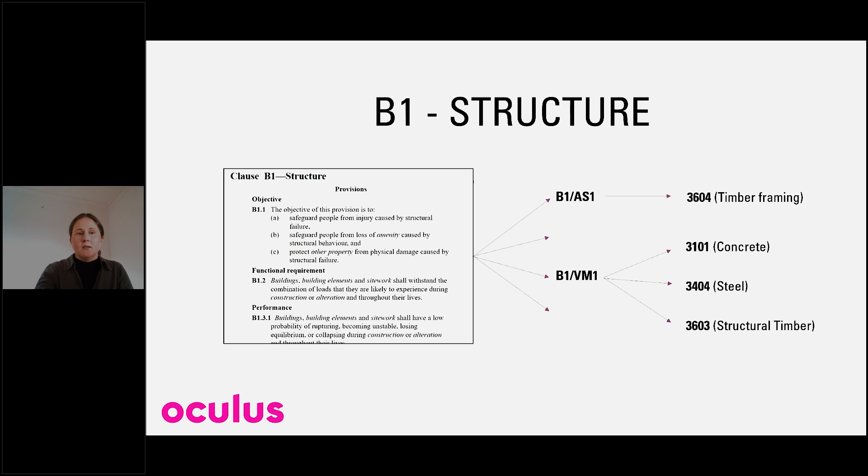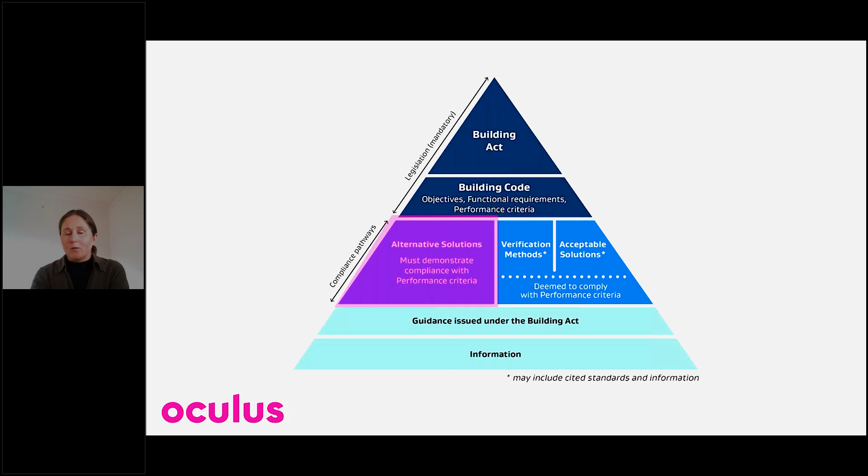Now, we also need to remember that we always have the alternative solutions sitting next to verification methods and acceptable solutions. That's highlighted in pink on the left-hand side here. That would be common, for example, with mass timber design or base isolated structures. They are currently not covered by any of our acceptable solutions or verification methods. And these alternative solutions exist for showing compliance to all code clauses.

So the same applies to H1. Our overall goal or objective is to facilitate the efficient use of energy. Under that, we have our acceptable solutions, which encompass both the schedule method, which is getting phased out at the end of this year, and the calculation method, which is slightly more flexible but still somewhat limited. Then we have our verification methods, commonly termed the modelling methods. Again, we have alternative solutions that are possible and sit alongside those compliance pathways.

Now I've got a little note there, my last slide. Note that none of the methods of H1 compliance will actually tell you how much energy a building will use. They're only really useful as a comparative tool. And it says that explicitly in H1VM1: the results of thermal modelling should not be construed as a guarantee of the actual energy use of the building. So they're quite plainly stating that this is a box ticking exercise and will not be in any way reflective of your power bill at the end of the day.

H1 also allows designers to manipulate or game the model. So you can theoretically make the reference building worse to make your design look better and therefore compliant. It also allows all sorts of thermal bridging, depending on your interpretation of some wording.

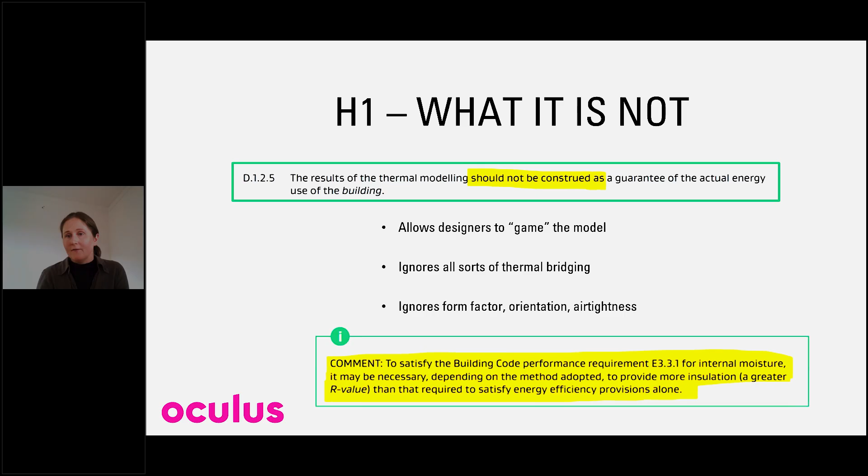of the building. And one last thing that H1 does not do is that it doesn't cover off E3 internal condensation. So to John's introduction point, by ticking the box of H1, we can't assume that we've ticked our E3 box. We might need to be coming back and adding more insulation to achieve internal moisture control. So that's our status quo.

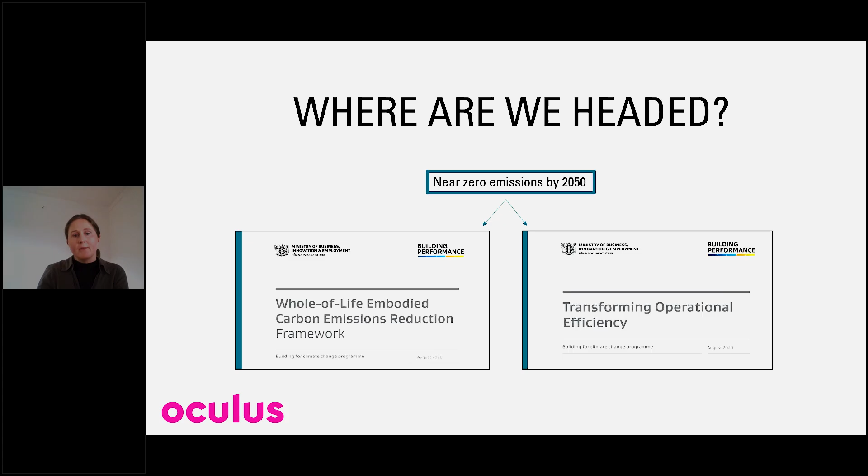Where are we headed? So New Zealand has signed up for near zero emissions by 2050. That applies to the construction industry, and we've got to balance two parts of that, both the embodied carbon, so the amount of carbon that's built in to a structure at the start of its lifetime. That sits probably best under the B1 topic of this presentation. And then we've got operational efficiency, so all of the energy use that that building will have over the lifetime of that building, and that's sitting more under the H1 part of this topic.

So under the operational efficiency, the Building for Climate Change program that MBIE has presented actually has targets to reduce our thermal performance demand in a series of stages. We've got an initial cap, an intermediate cap, and a final cap. Now they've listed the final cap in 2035, so only 10 years away, and that number that I've highlighted there, 15, is actually the same as the performance target for a passive house classic design in New Zealand at the moment. So it's a pretty ambitious target, I think, for 10 years.

It's fantastic to see, but it really indicates that the direction that we're going, we need to really be making massive improvements in the efficiency of our buildings. And that approach can become problematic with our common, status quo design approach of just shoving insulation in at the end, both from an energy efficiency perspective, but also from a moisture control perspective and a durability perspective. We've got more modern buildings that are more airtight. There's often not enough or adequate ventilation provided. And we've also got a compounding factor that less heat is escaping from our buildings because of this extra efficiency

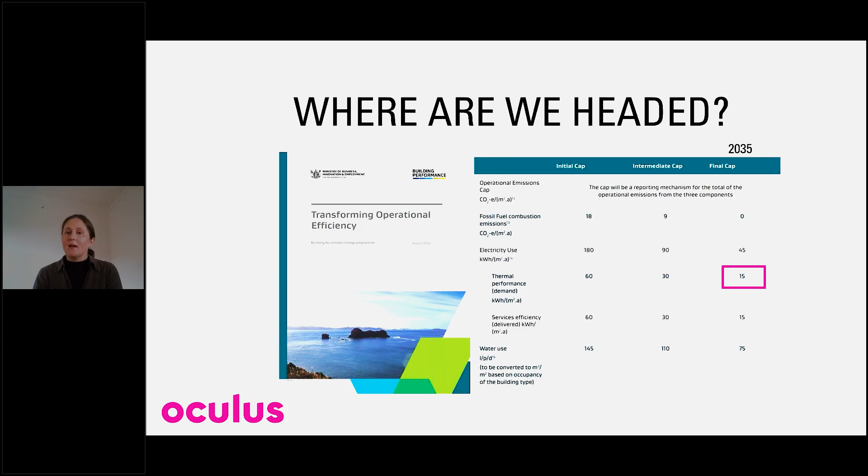that we're designing in. And that heat has, in the past, allowed us to get away with some bad design decisions where moisture would accumulate and then the heat would dry it out. If we've reduced our energy loss across the thermal boundary, then we're reducing that ability for our buildings to buffer themselves and fix the mistakes that we've put in. So yeah, that approach that we're currently heading down only can get us so far. If we're going to achieve these big targets that we've got, especially by 2035, then we need to start taking a step back and thinking, at an earlier stage, about holistic design.

So ways I think we can do that, again, is lifting the knowledge across the board. As I said earlier, we've got disciplines right the way across the mechanical engineering, architectural, structural engineers, quantity surveyors. They all need to understand these fundamentals so that those early stage design decisions are appropriately geared and setting us up for success. And good, you've jumped in here, John. We're going to use some of the tools where our building code might be lacking in the guidance that we have. You know, we need to start thinking about what experience our international colleagues have in this high efficiency design stage.

So, Robyn, I think it is a good time to jump in with the first question, and it came actually probably during my introduction, which I can understand, and this is really what this discussion is about. So the question that came through is, how can you say there is no problem with the building code and it's the industry understanding that is the problem, where there is no code requirement for airtightness or proper ventilation, recessed windows, etc., etc.? Do you want to give that a crack at responding?

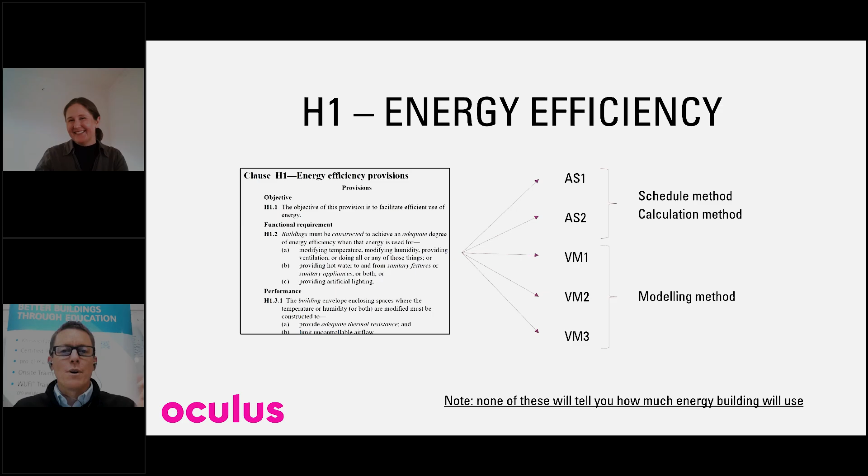Yeah. Right. Hey, I've got one quick question for you, which it's just a short one just to add in here. So when doing a small addition or alteration with, will the schedule method still be available, or will you need to calculate the whole of the existing, even if it's unknown? Is it? Oh, we don't need to answer it. If you don't know, that's fine. We'll just keep on cracking.

I think the status quo still applies, that the part that you're renovating needs to be meeting code. Whether you do that via the schedule method, the acceptable solution, sorry, the schedule method calculation, or modelling, if one of those gets taken away from you, you'll still have to meet compliance via the other pathways for the renovated portion.

Cool. I'll jump out the way again and let you crack on. Cool. Okay, thanks. So I think I've talked enough about fundamentals, and we've got to get into some physics.

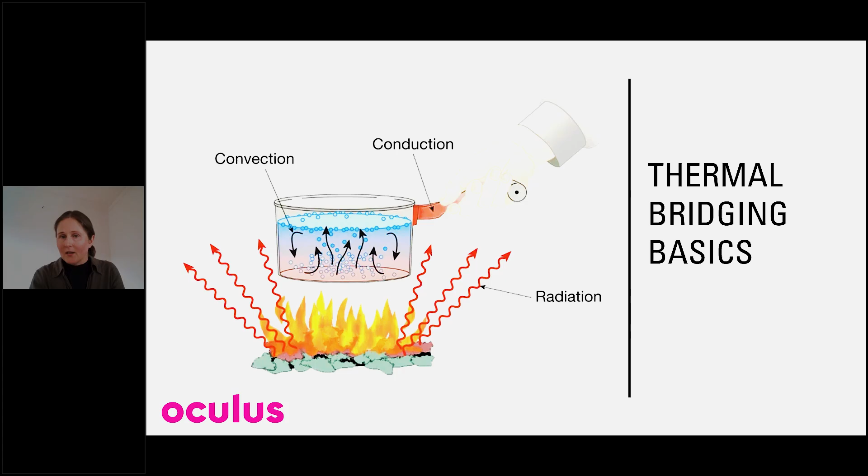So, thermal bridging. I think that's really the confluence of these two topics, structure and energy efficiency. A thermal bridge is where our layer of thermal insulation is interrupted. It relies on the concept of heat transfer via conduction. If you look at this little diagram, it's that person's hand getting burnt by the pot handle as the pot handle warms up. In an ideal world, our insulation layer would be completely continuous, not interrupted by anything, and would be outside of the structure to minimize the heat fluctuations and the moisture fluctuations that our structure needs to undergo. And that leads into durability.

So what's the problem with thermal bridging? It's not a very new concept, but it's completely overlooked because it's very easy to underestimate. It's supposedly hard to calculate. We can show you how to calculate that later on in the presentation. There's previously been a lack of data available. Again, I'm going to show you where to find the data during the presentation. It can be difficult to mitigate thermal bridges once you know you've got them.

And the kicker for me is that mitigation is not specifically required by our H1 AS1 and H1 VM1, acceptable solutions and verification methods. I think the wording in there is that you have to consider thermal bridging. But once you've had a few minutes of consideration, you can move on with absolutely no changes to your design. So yeah, I think we don't have a good framework for solving thermal bridges in our acceptable solutions and verification methods yet.

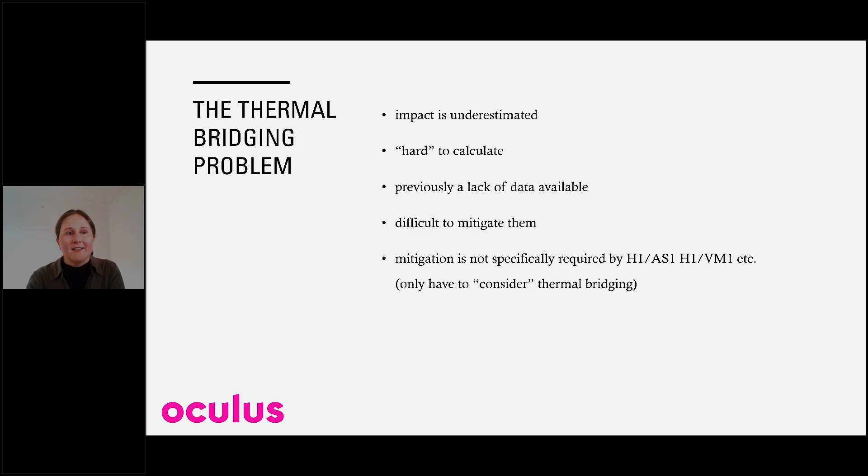So why should we care then? Well, we've got ultimately that goal of improving our thermal efficiency so that we can use less energy. We also want to reduce our risk of condensation and mold growth, and I'll dive into this a little bit later on, and also improving thermal comfort.

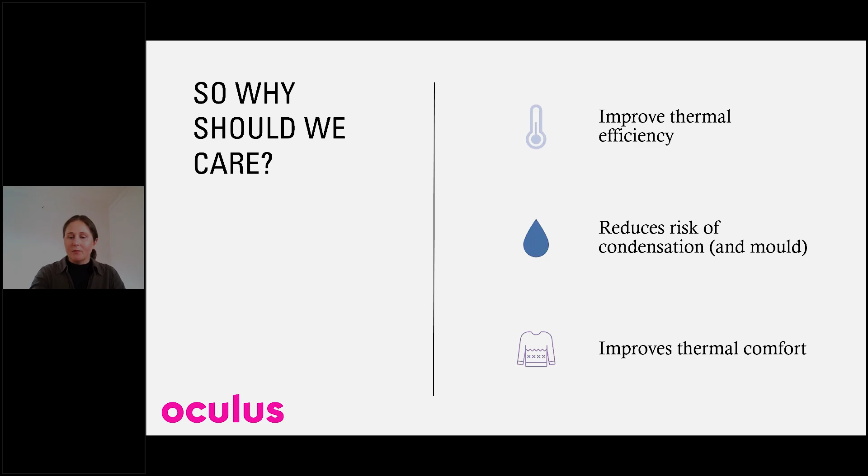Now, this is often quite a hard sell at a design table for a commercial building or institutional building. But when we talk about our homes and designing our homes to be comfortable, I think that really hits home for people. Thermal bridges create spots where heat can escape or enter more rapidly, leading to those zones being colder. So if you're sitting between something like a window and the heater in the middle of your room or office, your body is radiating more heat towards that window and less heat towards the warm interior. And so it leaves you feeling quite unbalanced and therefore uncomfortable. So if we can mitigate those thermal bridges, reduce those cold spots, then we feel much more comfortable in our homes, offices, institutions.

Now, I think key to this discussion is realizing the differences in the material properties that we commonly work with. So right at the top there, I want you guys to all remember this number when you go home. Steel has a massive thermal conductivity of 50 watts per meter Kelvin. Now, if you compare that to something like timber, which is in the decimal places, or insulation, again, 0.04, that number, that 50 number is huge.

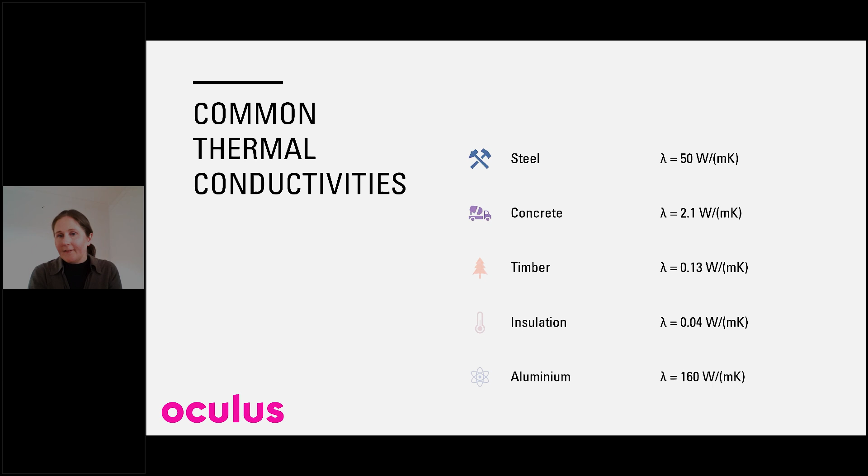Aluminium, again, that's off the charts, and you can see why there's been such a push lately towards thermally breaking our aluminium window frames. So yeah, the key thing to keep in mind here is the relative difference between these materials, so that we can better understand which of our thermal bridges are going to have more of an impact, and we can focus our efforts on mitigating those ones.

Another concept to keep in mind, heat flows in 3D. So whenever you're working with U values or R values, you need to keep in mind that these rely on assumptions of 1D heat flow, which is accurate if your assembly is consistent, like if you're between areas of your stud and you've got a nice chunk of batt insulation there. You've got even heat flow across all of those layers. But as we get closer and closer to the studs, if they were steel or even timber, we're going to have this heat flowing in 3D around those different elements.

And you can see here an illustration of that. The nice colourful picture on the left-hand side shows if you've got a steel column within the depth of your wall and you've got insulation on either side of it, the temperature of the steel on the interior side of that steel is essentially the same temperature as it is on the outside. That insulation on either side of it is not doing anything really to change the temperature of that steel. So by the time you reach the gypsum board on the interior side of the steel, those temperatures are around 8 degrees, even lower, and that gives you that risk of condensation.

So you can see on the right-hand side, that picture shows it really well. If you had a steel stud, you've got risk of moisture accumulating on that side, and therefore potential for mold growth in those areas. So we get those common strips of EPS to thermally break steel studs on the outside of the framing, but we need to think about, okay, those strips need to be at least a little bit wider than the steel stud to effectively mitigate that heat flowing around the corners, and ideally it would be continuous right the way across that layer, between the sheathing or cladding and your steel.

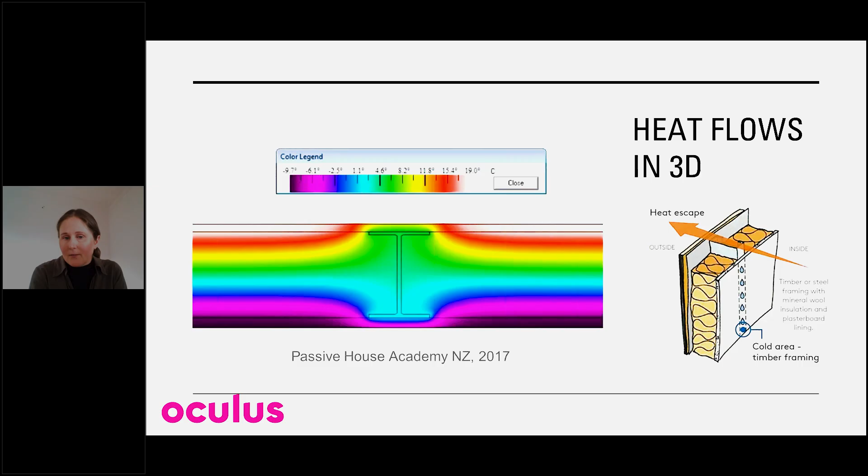All right, so as I said at the start, we're going to touch on internal moisture, E3 as well, because it's so related here. So going back to the code clause, again, our goal or objective is to safeguard people against illness, injury, or loss of amenity that could result from the accumulation of internal moisture. And then we step through into the functional requirement. Buildings must be constructed to avoid the likelihood of fungal growth or the accumulation of contaminants on linings and other building elements. So that's actually fantastic in my opinion.

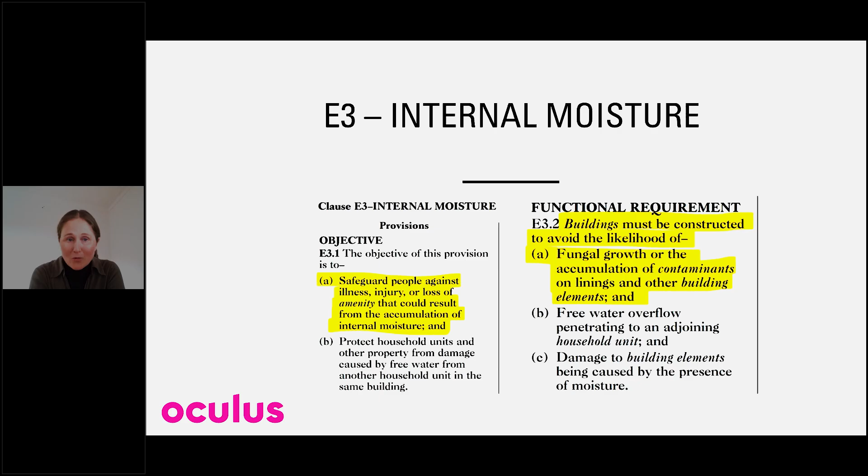I think E3 as a code clause is awesome, but unfortunately it really again starts to break down when we reach the acceptable solution. There's such limited guidance around a key thing like thermal bridging, and it's led to a lot of confusion in our industry.

Sorry, I have to take a little pause. I'm 7 months pregnant and puffing and panting my way through this presentation. You have to excuse me.

Recently had an example. I'll just jump to the next slide actually. We define thermal bridging in three different ways. It's the same thermal bridging, but this is just the name. These are just the names that we give them.

So if you're dealing with an area, so a wall or a roof where you've got a regular interrupting structural member like a steel stud or a timber stud, those types of thermal bridges can often be dealt with in the U value or the R value, and so we call those 1D or an area thermal bridge. The next one along is a line, so a 2D thermal bridge, for example, a slab edge or a mid-floor in a multi-story building. And then a 3D is a point thermal bridge, so an example there like a steel beam that's penetrating out

through the thermal envelope. So that example that I was about to start earlier, we had a project come across my desk where the roof structure had these steel beams that were supporting a canopy that wrapped around the house, all the way around the outside of the house. And in consent, the building consent officer correctly pointed out that there was a lot of thermal bridging going on, and therefore a high risk of condensation problems at the points where these beams penetrated through. But unfortunately, they referenced that clause in the acceptable solution.

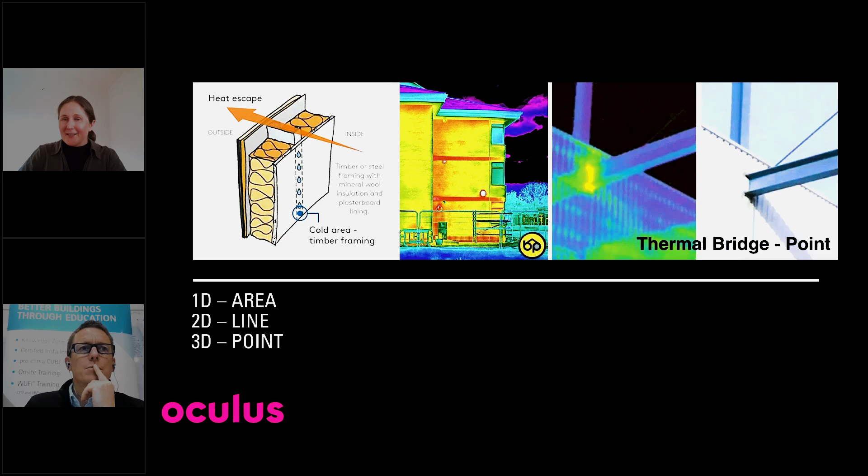So yeah, that's a really good example of how our code, or the detail that's provided in our acceptable solutions and verification methods is causing confusion, because there's not really the fundamental science direction given. So we need to look elsewhere. We need to be thinking alternative solutions, international guidance on how we can mitigate these thermal bridges. Do you want to jump in there, John?

Quick question. Yeah, can you just spend a moment with the 1D area, because it looks from your diagram there like it would be easy to see that as a line, because it's one piece of steel. You just want to describe how you differentiate between those two? Yeah, sure. You're absolutely right, and the concept of thermal bridging still applies across these different definitions. It's just the way that we term them and deal with them in energy models. So, for example, in a wall or a roof, we have studs at 400 centers or purlins at 900 centers. Those are repeating elements, and we can predict and estimate those and average the effect of those thermal bridges into our U value or our R value. So that's a nice simple way that we can account for those, what they are, as you say, line thermal bridges, but we can bake them in to our R values.

Okay, across an area. And then just really briefly on that, then with that diagram on the left, the best way of dealing with that wall with steel frame, because the steel frame's not the problem, right? The material isn't the problem, it's how we've dealt with it. So how do you deal with that? So the best way to deal with steel framing thermal bridging is to have a continuous layer of external insulation sitting outboard of that steel framing. So that means it's going to go right across your building paper or your cladding line, and it's going to be continuous. There will be no interruptions, and no ability for that heat loss to escape. Right, cool. Excellent.

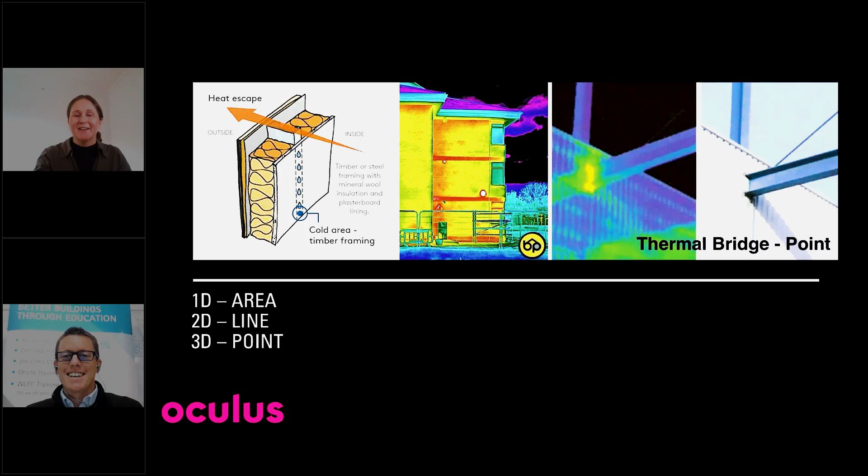Thanks, John. Okay, so if we were to look to the Passive House Standard, international experience, how can we more accurately define and therefore mitigate these thermal bridges? Well, we would use a 2D or a 3D software modeling tool, and we would be modeling to this ISO standard. And there's software packages out there such as Flixo and Therm in the 2D space. In the 3D space, I'm not that familiar with them, but they're all sorts of finite element analysis based software tools for modeling elements in 3D.

So here's an example of where a balcony is supported by steel beams that are point thermal bridges, so 3D thermal bridges. They've been modeled in a 3D software program. You can see that in the nice isothermal colorful picture in the middle. And then they've designed the thickness of the thermal break that they've put between the steel and the concrete mid-floor, and then they've designed that thickness to meet the requirements of what we call the FRSI, or the hygiene criteria. And that's just a pass or fail criteria, and that demonstrates whether you've got a risk of mold growth at that point or not.

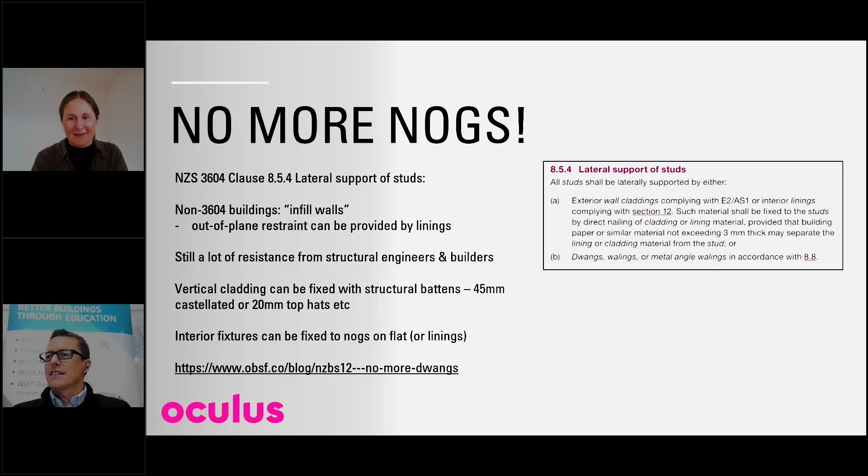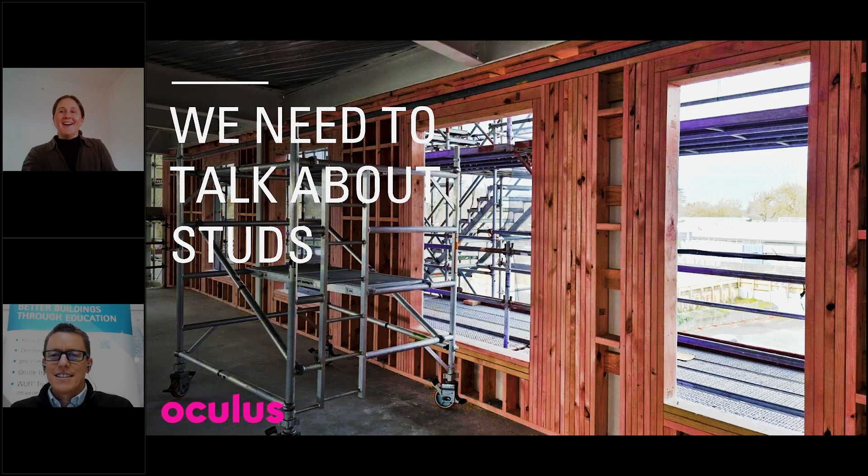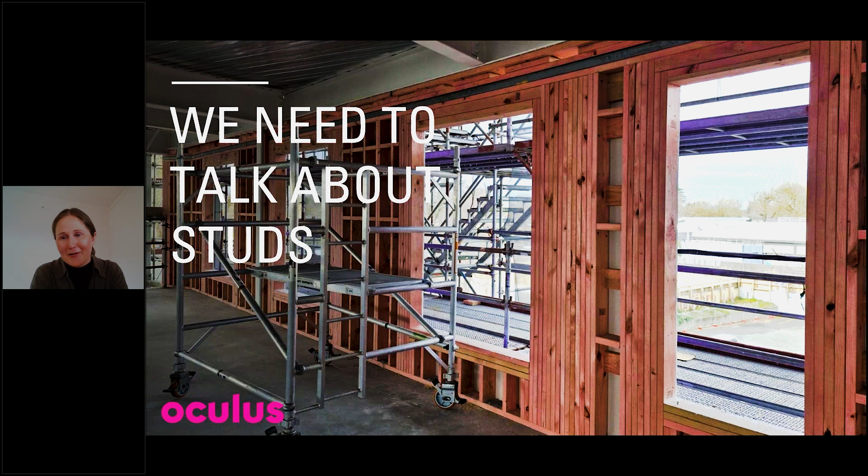Right. Now this is the big one. I got a little bit despondent about this recently, having had the battle in the design meetings, managed to convince everyone that we didn't need nogs, and then got to site and we see things like this all the time. That picture is taken from one of our construction sites, and I've counted them: there are 14 studs next to that window jamb. 14. I cannot rationalize what you would need 14 studs for. All I know is that we have lost an opportunity to insulate that wall properly.

A Beacon Pathways study, not that recent, actually a few years ago now, found an average of 34% timber in our typical walls, whereas H1 calculations sit around an average of 14 to 18%. So we're massively overestimating the thermal performance of our walls. In the MBIE consultation paper that came out more recently, they released data from PlaceMakers, who looked at their manufacturing records of pre-nailed frames, and out of 452 buildings, they found an average of 38% timber. That consultation paper actually proposes lowering the R-values we assume for walls to be in line with those numbers. There's a bit of weird logic there, but I think acceptance is the first step to solving the problem.

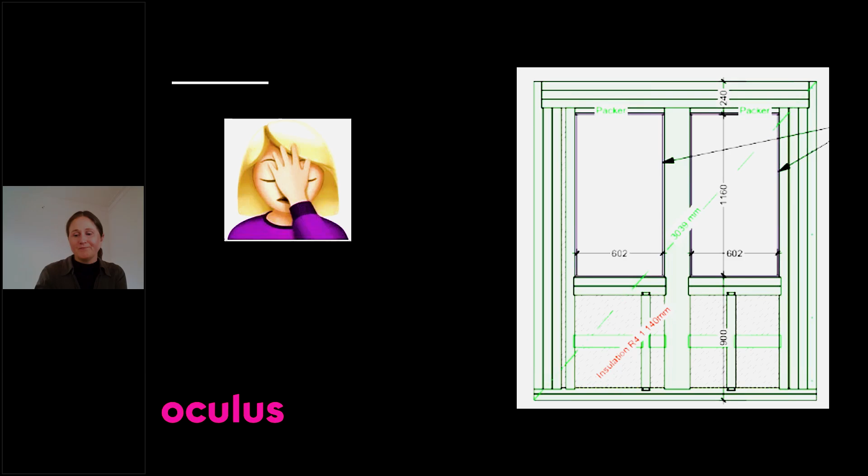All right, so somebody's going to chuck the link to this fantastic document into the chat. I hope everybody in this webinar has heard of this, or is at least now going to go and have a look at it after this. But this is a handbook that was put together between BRANZ and PHINZ, so Passive House Institute of New Zealand, done by Jason Quinn and his fantastic team at Sustainable Engineering, and they have gone through a whole lot of typical New Zealand construction details, and they've modeled them with those software tools that I referred to earlier, so that we've got the data available to deal with thermal bridging.

So now we can take these numbers, they are sitting there with a range of insulation and thicknesses of studs usually, and you can look through this book, find what's most appropriate for your building or your detail. It's not always going to be perfect, but there's a starting point there for being able to know how much heat loss is going to occur at that junction, and being able to quantify whether your FRSI or your hygiene criteria is met. What's the risk of mold growth or internal condensation at that junction?

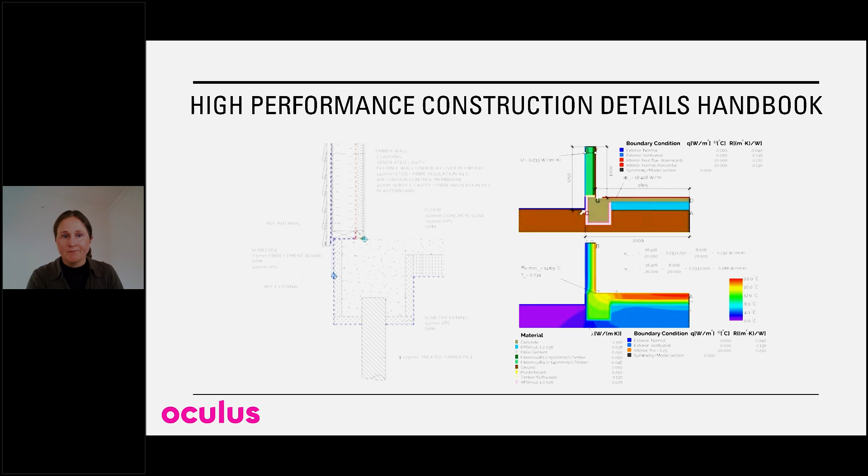All right, and then last thing I wanted to talk about was some of these exterior insulation and warm roof assembly things that I've mentioned. I know they won't be commonplace for some people in the webinar, so how can we, if you've never done exterior insulation, where's your first port of call? So here's an example, a photo showing a rock wool exterior insulation. There's a couple of different options out there, but rock wool is a fantastic product because it's non-combustible. So it can be used for all different heights and risk levels for reducing that fire risk in the cladding cavity. Another example of an exterior insulation is PIR.

So that's polyisocyanurate, a rigid foam insulation, and that is also suitable, but there's a fire risk associated with that one. So it's more limited to the lower below 10 metre buildings. And this photo also shows you how you can attach your cladding to that, like once you've got your insulation on the outside, how do you then attach the cladding over the top of it? There's this whole lot of different systems out there. Outright is a really good company to look at. They've got a whole different range of solutions.

I think Roof Logic also do a system for external insulation. I mean, there's a number of different companies that will be kicking me after this for not having mentioned their names, but those are the two that spring to my mind. And yeah, lots of different systems, and they can be applied to any cladding type that I've ever heard of. To date, I don't know of any cladding systems where you can't use external insulation, including brick. So yeah, there are clip systems that can allow for brick to be put on the outside of an external insulation system.

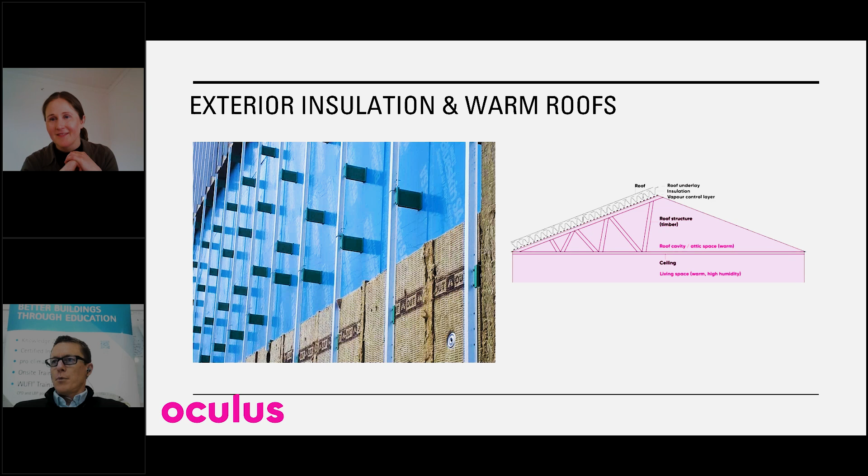All right, going way back into your presentation now, which is fine. Does the minimum thermal break of 10 millimeters of an XPS strip at R 0.25 actually mitigate against condensation in a steel framed wall? Yeah, that's the end of the question. So does it actually mitigate? Does it make the difference? Can it make any difference? It can make a difference.

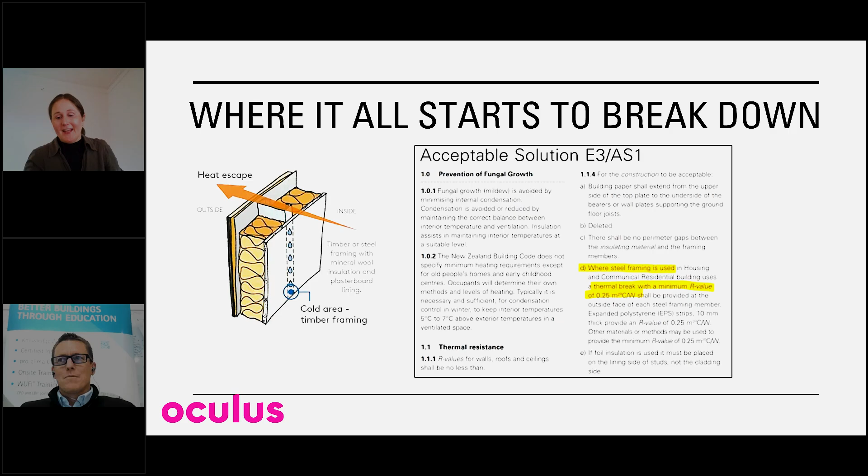It depends what you are measuring it against. If you did a Flixo model like one of these, and you measured the FRSI number, so that's the pass-fail criteria around condensation risk, it depends on your climate and your interior conditions. So how much humidity is in the room, what is the temperature, what's the relative humidity of the external air, and the occupancy of the space, obviously, the number of people in there that are heating, cooking, doing their washing, those factors all come into it. So I can't give you a yes or no on that.

Well, it sounds like a very engineering response. It depends. But let me put it to you another way. If you had opportunity, or if you were building like this for your own home with your family, would you put EPS strips of 0.25 outside your steel studs on your framed wall? No. Okay, thank you. I hope that was an adequate answer to that person's question.

Who is providing the PHPP service? So that's the Passive House Planning Package service as a provider, and what are the best details available to integrate high performance with the building code? Let's deal with the first one first. So who's offering PHPP modeling as a service? Anyone who's a passive house designer would be using PHPP software. There might be others out there. I know that our company uses PHPP as a modeling tool as well for non-passive houses.

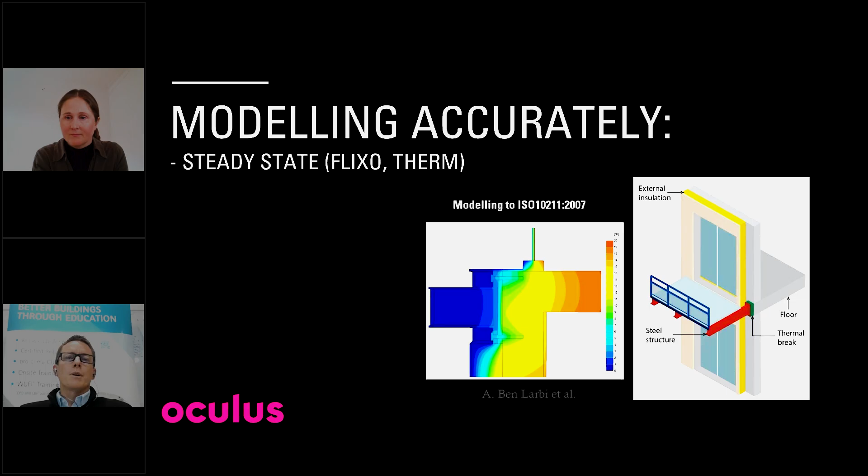So what tools are available in New Zealand while designing around thermal bridging, particularly when it comes to building concrete walls? So what tools would be applicable? Fantastic reference in here. So back to the construction details handbook, there's some concrete slab edge details in there that you can start with. If you had concrete like precast panels in your wall, then I'd recommend starting to look at a concrete sandwich panel. So that's allowing a continuous layer of insulation to be sandwiched in between two bits of concrete.

So usually the interior is your typical 150 or 200 mil thick precast concrete. You'd have maybe 50 mils of rigid insulation and then a 50 mil thick wythe of concrete on the outside, and they're connected together with some clever clips. And there's a precast yard in Auckland that I know has made these for a recent project. So yeah, the solutions are there and being made in New Zealand. So it's not too far away from reality.

Great. Well, Robyn, hey, thank you so much for your presentation. I know there's a string more questions that are sitting waiting that we haven't got time for. There's a bunch of questions and statements, both for and, well, not just against the whole NOG thing, but just asking for more clarity. So that's a good push there to go and read that article for a start, and maybe get in touch with you before you go on maternity leave to get some responses there on the NOGs thing. I hope everyone has enjoyed this session, has been challenged across this lunchtime.